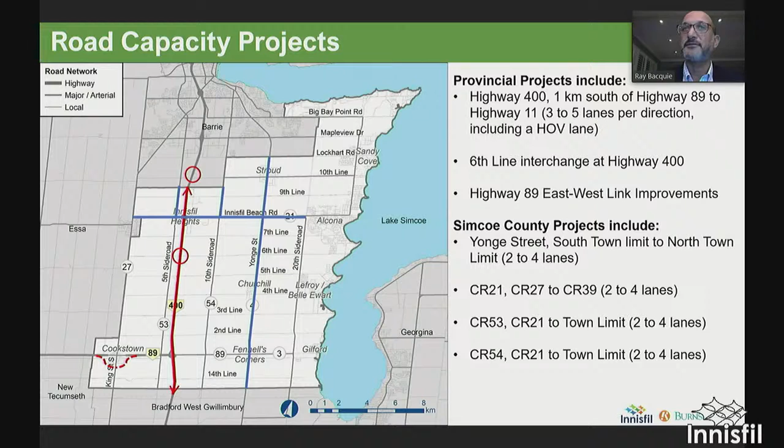To lessen the constraints there, we recognize that with the provincial initiatives for Highway 89, east-west travel in the vicinity will be increasing as a result. So the introduction of the Bradford Bypass without some treatment of Cookstown will have its impacts within the town.

For Simcoe, there are a number of road projects, including Yonge Street widening from 2 to 4 lanes, County Road 21, County Road 53, and County Road 54, which are either planned within the next 10 years -- County Road 54 I believe is beyond the 10-year time horizon -- but those are all identified as improvements necessary to support that interregional, municipal travel.

Got a couple questions, Ray, and I think we'll just need to go back to the previous slide, just showing the different scenarios.

The question is, how do you look at it in regards to the cost of the different scenarios? That's a good question. We will be doing more detailed costing. At this stage it was a higher level of cost assessment based on the 2018 DC estimates and equivalent estimates of the projects coming forward. There were just over $400 million worth of improvements identified over a 20-year period in the 2018 master plan. We're anticipating in the order of 15% or thereabouts more for these different scenarios, plus or minus. That difference, based on the projects we were considering, is how we scored the last row, the financial row of the assessment.

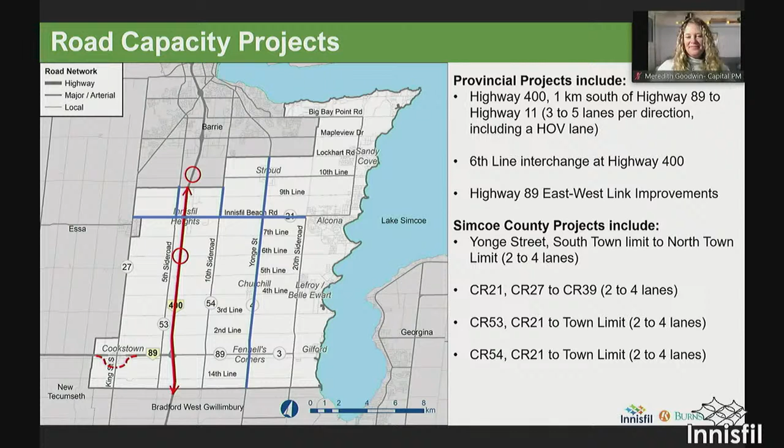In addition to those capacity improvements, the strategy includes road network improvements identified in the 2018 master plan to address growth to 2041 on town roads, including widening of 6 Line through two sections, and a number of signalized intersections anticipated to meet warrants, helping with traffic control, safety, and accommodation of active modes.

And as Meredith just mentioned, the introduction of roundabouts, with 3 locations identified in that 2018 plan. And maybe that's a cue for another Slido quiz.

We also apologize, some of the maps are hard to see. It's a lot of detail to try and fit all of Innisfil on a map, so we know it's a bit hard to see, and that's why Ray is trying to explain all of these locations. We will have the slides posted, and we're not sure everyone's ready to ask questions, especially if it's difficult to see the details, but we definitely will be listening out as people present questions or comments over the next couple of weeks at least.

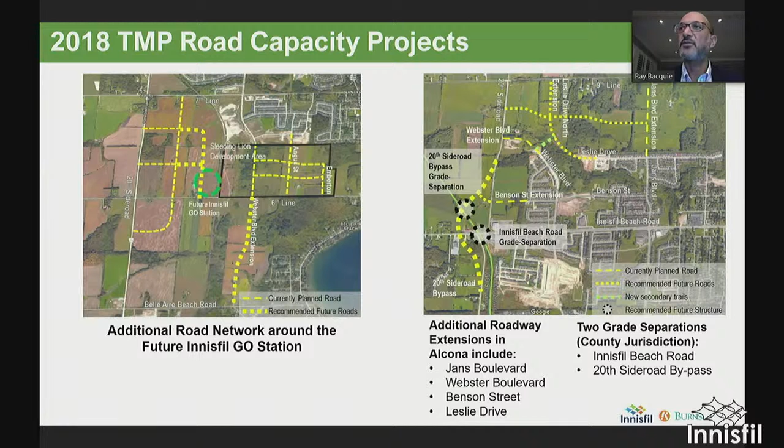Okay, so back to the road network. The 2018 Transportation Master Plan included a number of new road connections identified in these two figures, serving the GO station area, now the Orbit community, and the Alcona community, including Webster Boulevard extension, and subdivision circulation roads east of 20 Side Road and south of 7th Line, including Jans Boulevard and Benson, and Leslie Drive extension, as well as the 20th Side Road bypass or realignment.

In addition to those improvements, based on our forecasts, we've identified additional opportunities to address capacity improvements on town roads and resolve anticipated operational needs, including the widening of 6th Line to 4 lanes. As we've been made aware that the timing of the Orbit is a long-term development, and the need to address those potential needs extends beyond the 2051 time horizon of this study, we've also identified the likely need for protection of 6 lanes in the ultimate term, and active transportation. We'll be looking in more detail at those needs.

We have a couple questions, one about roundabouts. I didn't want you to go too far, we might need to go back to the slide showing the roundabouts and recommendations. So there's a roundabout on the 25th. Is the 20th Side Road roundabout the one for 25th? The question was, is there two? Are all those 3 roundabouts on 20th, or is there 2 on 20th? Is there one at 9th and another at Webster? I think there was a 25th roundabout too. So just a couple questions about the roundabout recommendations.

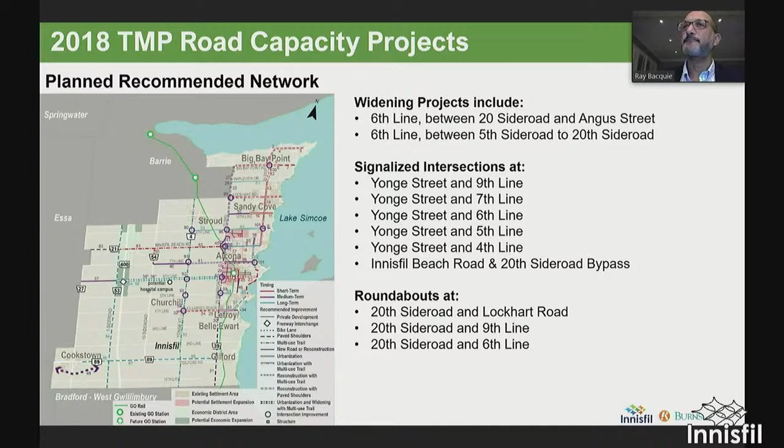Okay, so we were partway through this — we talked about 6th Line. On 14th Line, it has been identified that certainly in the need for east-west capacity in the vicinity of Cookstown, this study is being coordinated as best as we can with the adjacent municipalities. New Tecumseth has identified improvements to 14th Line, including a widening of the section a ways to the west, and then reconstructing to a paved facility through and approaching the boundary with Innisfil. That route will be seeing higher volumes as a result, and there will be a need as that traffic grows to do the same on the Innisfil side, at least to 27.

There's a question specifically about Orbit, and if we're looking at Orbit through the full build-out in this transportation master plan. Yes, we are — Orbit is actually going through a secondary plan process right now, which is to be completed, I believe, next year. So we'll work with the team to make sure that Orbit is incorporated into this TMP well prior to the next transportation master plan update.

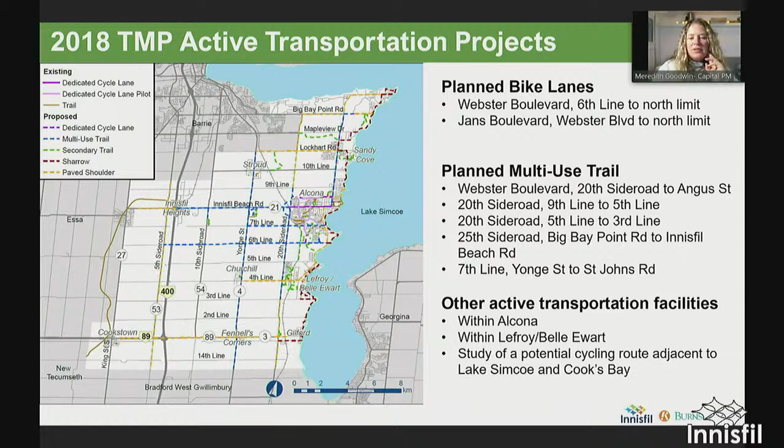If you could go back to the question, there was a question about Cookstown and some of the existing traffic and parking issues they have. I think it was just generally a comment that the theater facility on King Street South has no parking lot and has caused some parking issues pre-COVID. So that was just a comment related to that one.

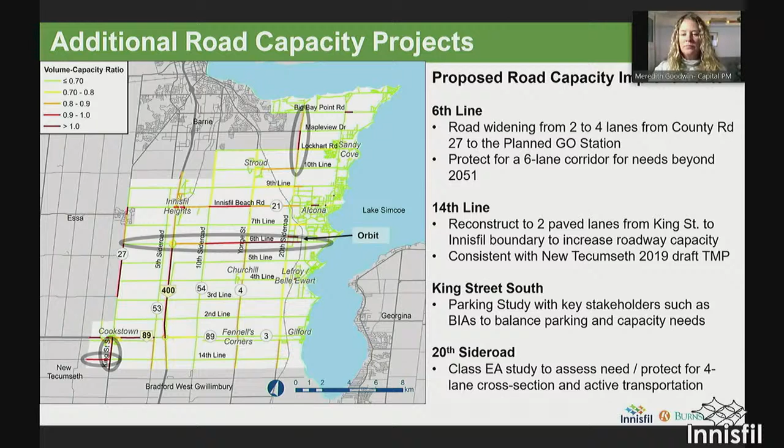Thank you. We're also getting a question about these maps and if they'll be available on the site, and they will be, so that you can zoom in and see everything. I know it's hard to see everything, but we'll make sure it all gets loaded onto the site. Thank you. One more question, sorry. There's a couple, and I'll hold off on one because there's a good one, I'll just wait for that a bit.

Will there be any delineation between bike lanes and vehicles along the 25th aside from the painted lines? I believe we're doing a multi-use trail on 25th, so that would completely separate the bike from the road on that project. And that's correct — Bobby Joe, the project manager, is in this meeting and confirms that is correct, the trail is being designed right now.

Sorry, Ray, we keep interrupting you. No, it should be more of this kind of discussion, and even if it's somewhat controlled, I think that's helpful for us. Again, we're here to present, but also to listen to the comments and questions.

On this slide, we just highlight the study — how it has identified additional opportunities for active transportation connections, accommodating cyclists, and this is more multimodal, not just purely walking.

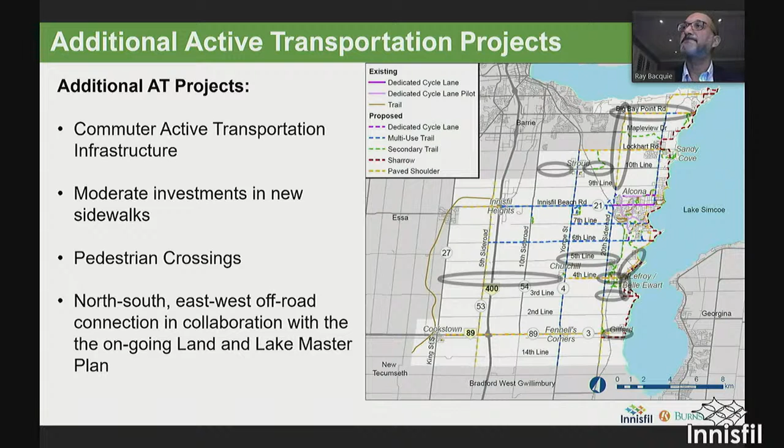In terms of sidewalks, there are opportunities for improving connectivity that were assessed to improve pedestrian mobility and safety, with new sidewalks illustrated on this map on slide 29. We're focusing on continuity of routes, connections to key destinations including schools, and links to the future GO station. These projects, with quite a number of stretches, would need to be prioritized over the next number of years, certainly over the next 20 years or so.

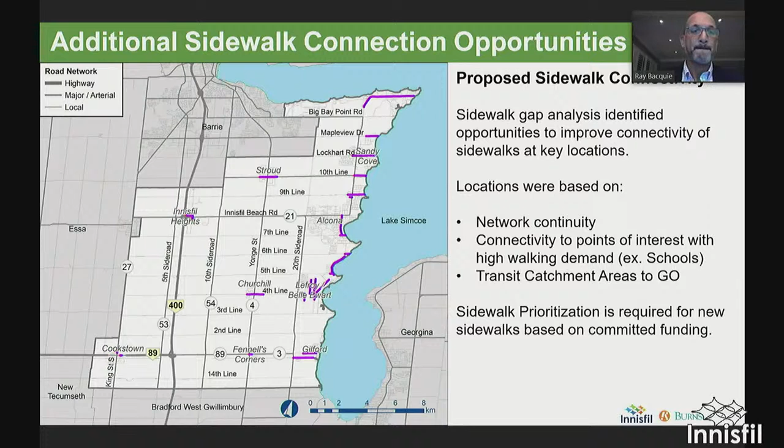We did talk a little about complete streets policies, and there was a question about how to implement them more quickly. Design projects underway and future design projects, even reconstructions, would follow the town's complete streets policy, which we're reviewing — incorporating changes that have occurred with policy documents, including the most recent OTM Ontario Traffic Manual Book 18, the cycle design guideline for Ontario, and other streetscape and maintenance requirement considerations for the design of town roads.

I think we may have another question. We're interested in how the provision of bicycle facilities affects your travel characteristics and experiences, and we'd like to know your outlook, and for you to share with your fellow residents your thoughts on how these facilities affect you.

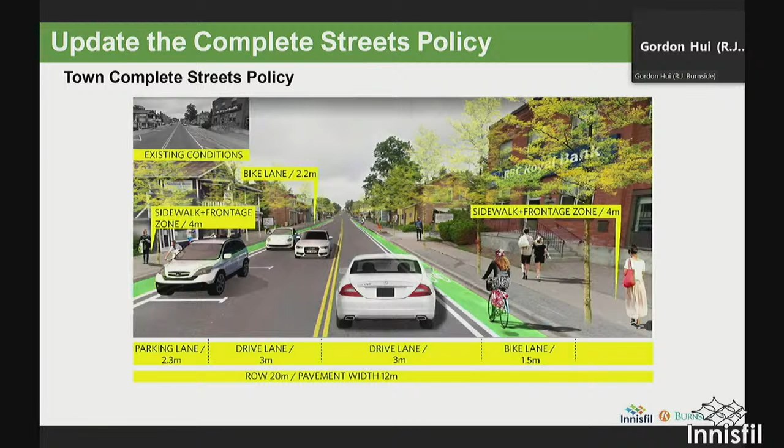I think we're a couple of slides now. The preliminary preferred plan includes the development and implementation of a pedestrian crossing policy. The policy defines the practice for installation of new pedestrian crossings, whether they're traffic signals, PXOs (pedestrian crossovers), stop control, school crossings, or uncontrolled crossings.

These types of features are documented in the approaches and methodologies in another manual called the Ontario Traffic Manual Book 15, which focuses on pedestrian crossovers. I was involved in the first OTM Book 15, the writing of it, and one of the key elements is

defining the methodology for selecting crossing types and controlled crossings. But the book recognizes that each jurisdiction is different and has different expectations, and it's good to have the public understand what is expected at approaches, so there's some level of consistency across the jurisdiction. So we've worked away on a draft policy which we'll share. It takes into consideration the OTM book guidelines, but also recognizes the characteristics and needs of the town. Gordon was talking about the question that came through about school sites, and we've specifically plotted those. We haven't shown them in this slide deck, but we have those locations and have incorporated the identified locations or future crossing locations

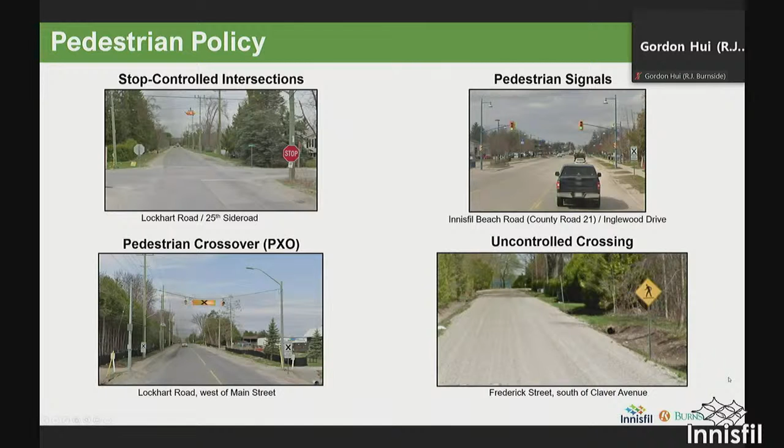In terms of this plan, as proposed, we've reviewed the existing and future transit demand and identified opportunities for improved transit service that builds upon the Uber partnership, looking about 30 years into the future. We're looking at the key origin and destination travel points identified through data provided by Uber, and we've also looked at planned and ongoing development. So we're using that information and data to forecast where trends are today and where they may go in the future. Obviously there's a high linkage with the Barrie GO station as a key destination.

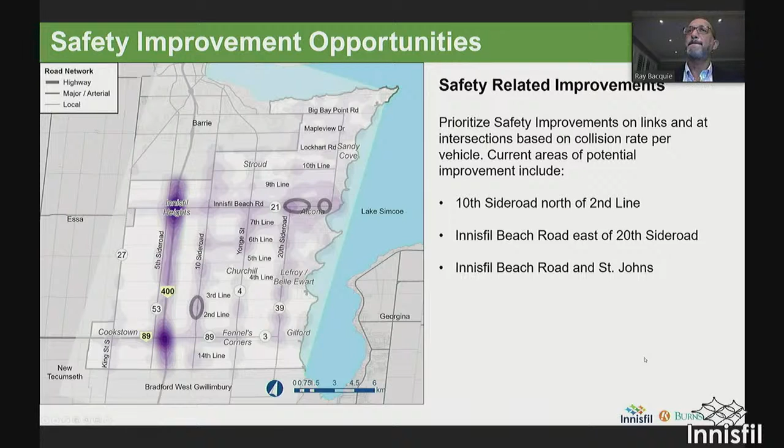And then the last component of the strategy is accommodation and promotion of emerging technologies, leveraging them where possible. The first mile, last mile is an important component.

The town has been involved in the Share Cycle program, which was launched just before the last TMP. There may be an opportunity for further or similar programs, and the shared bike or rent-a-bike initiatives are quite popular for first mile and last mile, definitely something that can be incorporated with the GO station as it's established.

It was noted that 70% of respondents in the first public open house survey were very interested or somewhat interested in bike share or e-scooters, so it's definitely something to document and identify.

Again, the key locations for potential benefit are along the lakefront, and the lake and land folks may have more thoughts along that, and definitely for the future GO station.